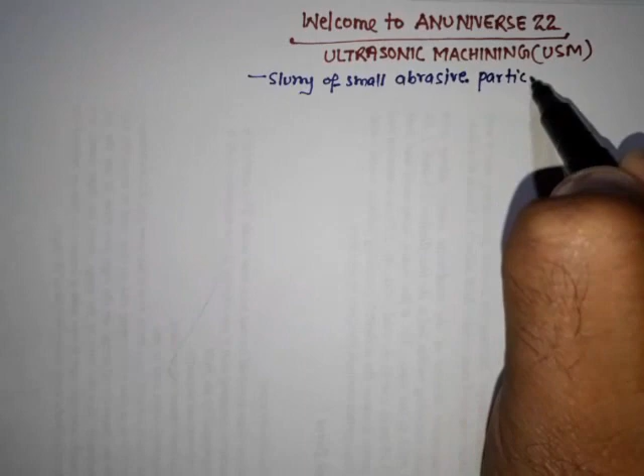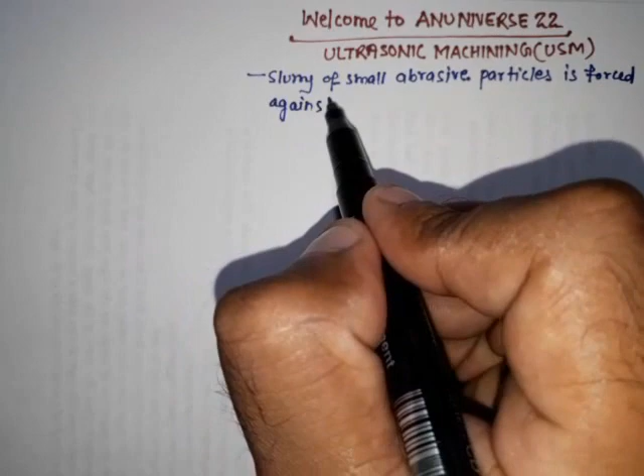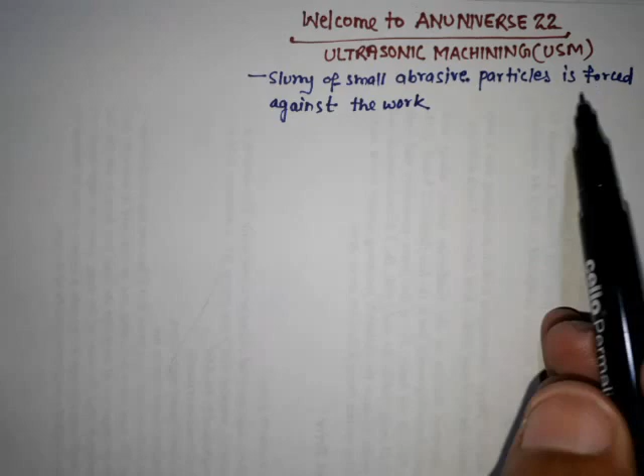So firstly, in ultrasonic machining, a slurry of small abrasive particles is forced against the work, by means of vibrating tool.

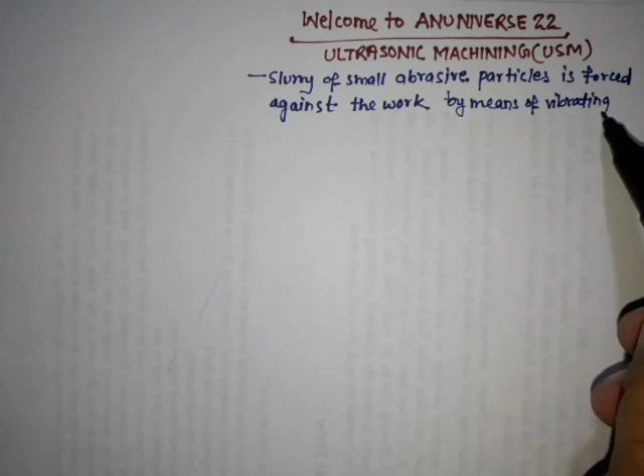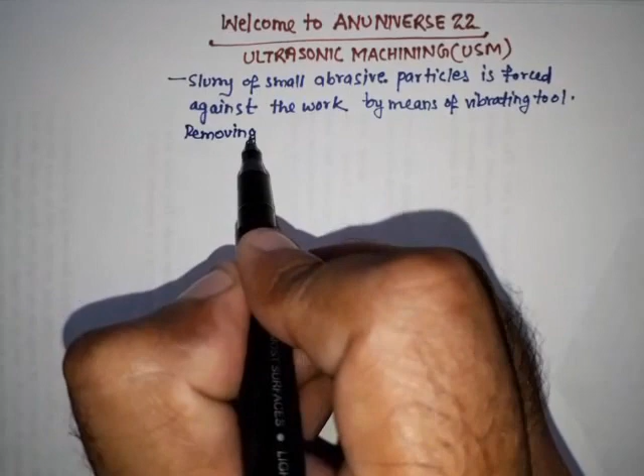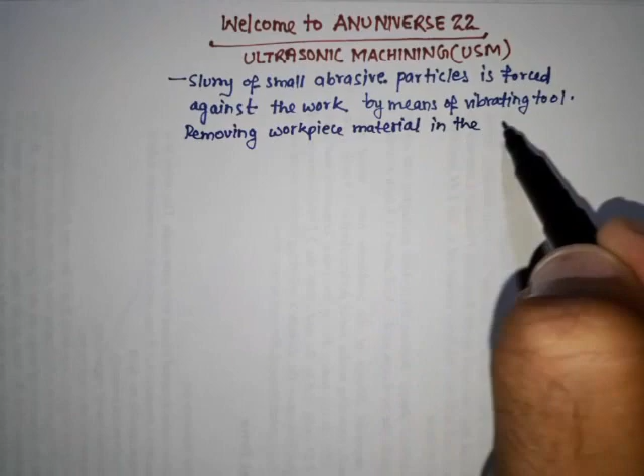And so with the help of vibrating tool, removing workpiece material, in the form of small chips.

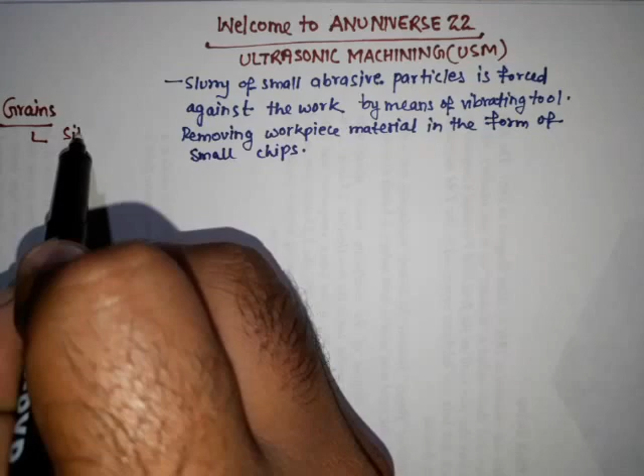And the abrasive grains which are generally used for this, these are generally made up of silicon carbide, aluminium oxide, and boron carbide.

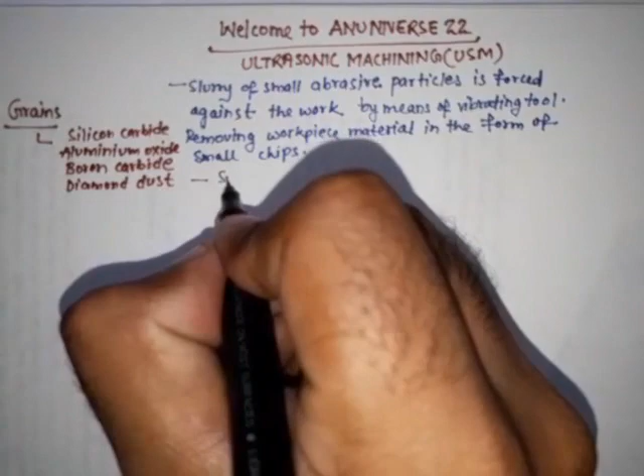And again, this process is mainly applicable, and we can say it is suitable only for hard and brittle materials.

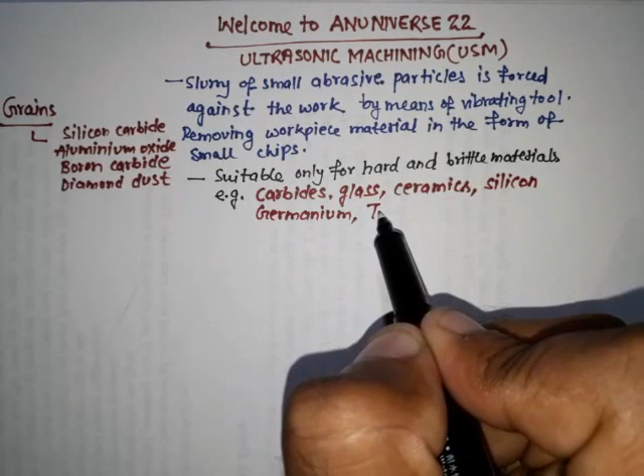So for example, carbides, glass, ceramics, silicon, germanium, titanium, tungsten, tool steel, die steel, ferrite, quartz, etc. So these are some of the materials for which this process is suitable.

And here one thing is important, that the vibrating frequency used for the tool, that is of the order of 20,000 oscillations per second.

And this is such a high frequency which is more than the upper limit of audible frequency for the human ear, and it makes the process inaudible, silent.

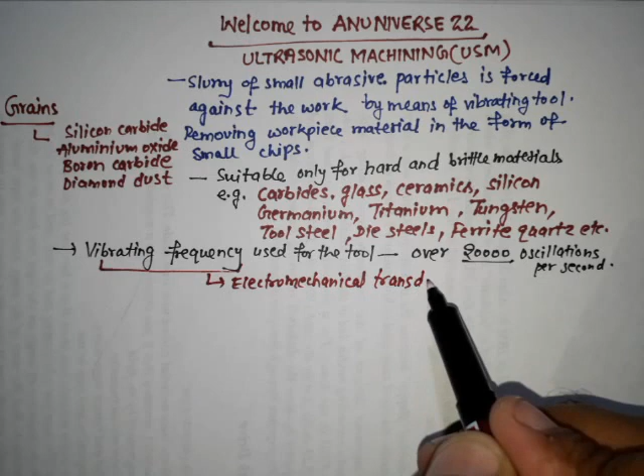And an electromechanical transducer is used for producing this high frequency of vibration. This transducer is made of magnetostrictive material.

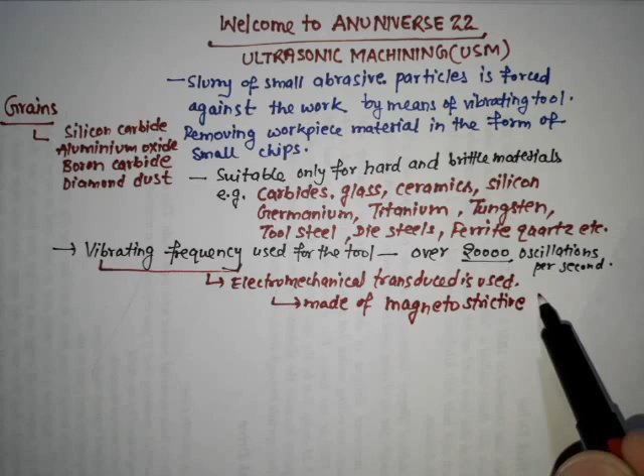So all this process we try to understand with the help of a diagram. This is ultrasonic oscillator, and here high frequency electric current is used to supply.

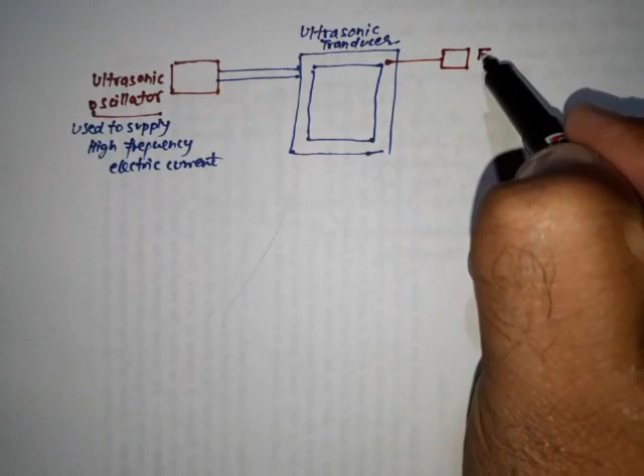And it supplies this high frequency electric current to the ultrasonic transducer. And here is the feed mechanism. And these are the coils.

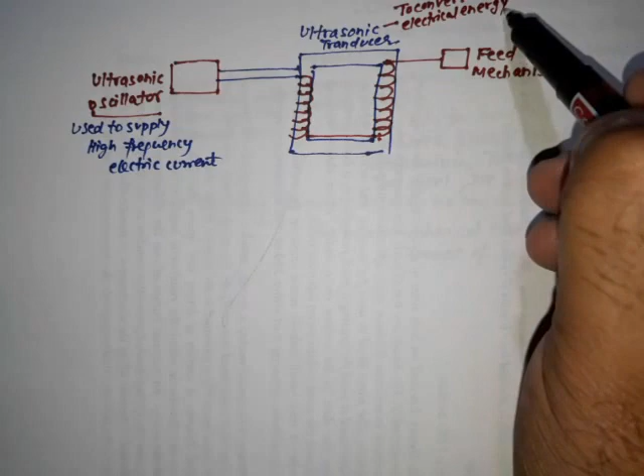So here the function of this transducer is to convert electrical energy into mechanical vibration.

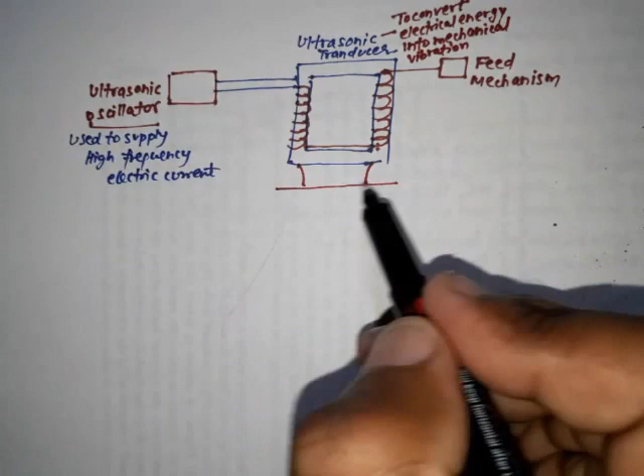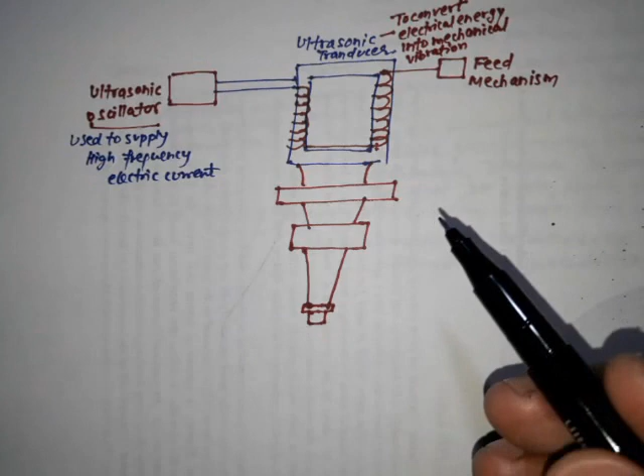And another part, these are the arrangement: transducer, cone or horn.

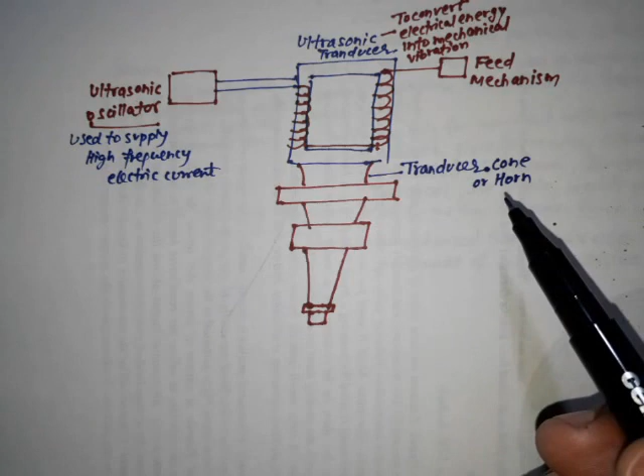So here the vibration that is generated is of the order of approximately 20 kilohertz to 30 kilohertz, and the amplitude usually varies from 0.01 mm to 0.1 mm.

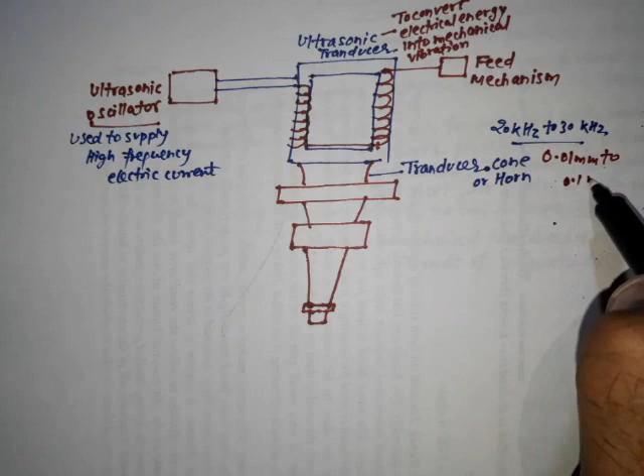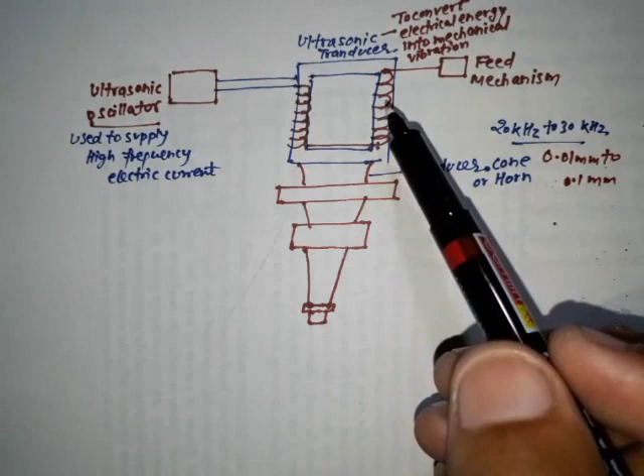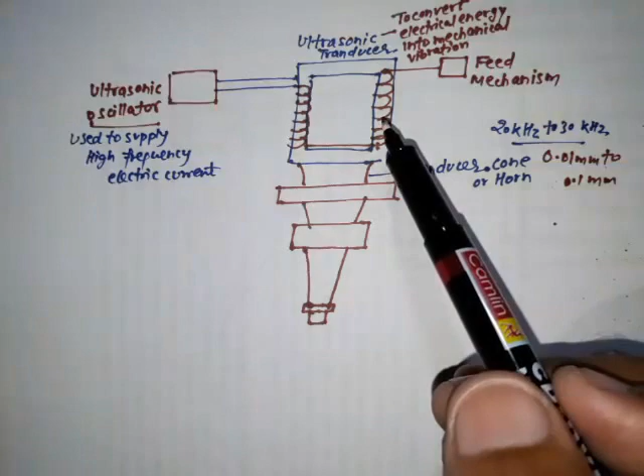And here the transducer, made up of magnetostrictive material, is excited by this high frequency current, and this results in generation of mechanical vibrations. These mechanical vibrations generated in the ultrasonic transducer are then transferred or transmitted to the cutting tool.

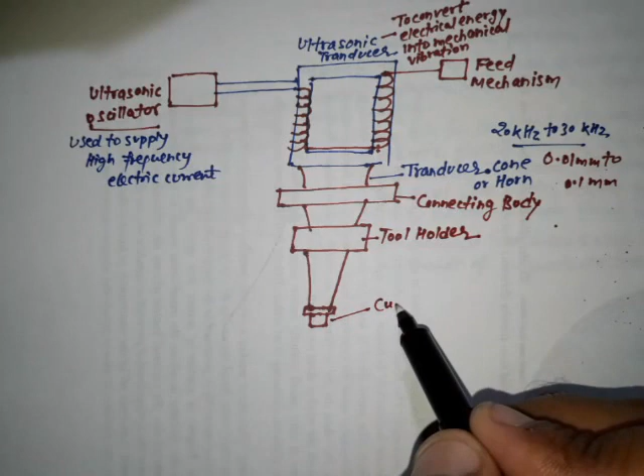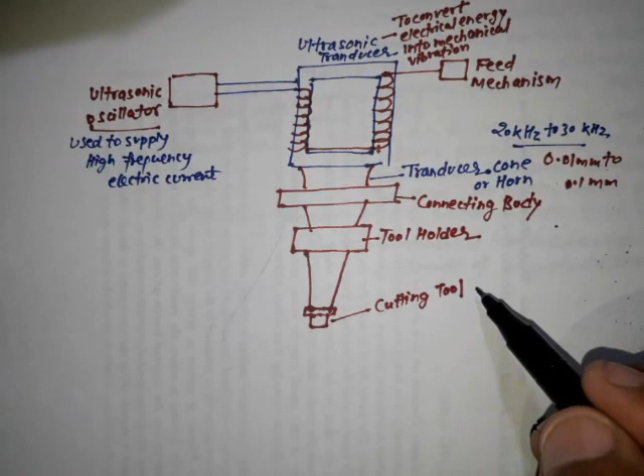So here this is the transducer cone or horn, this is the connecting body, and here it is the tool holder, and this is the cutting tool. This tool is made of soft metal.

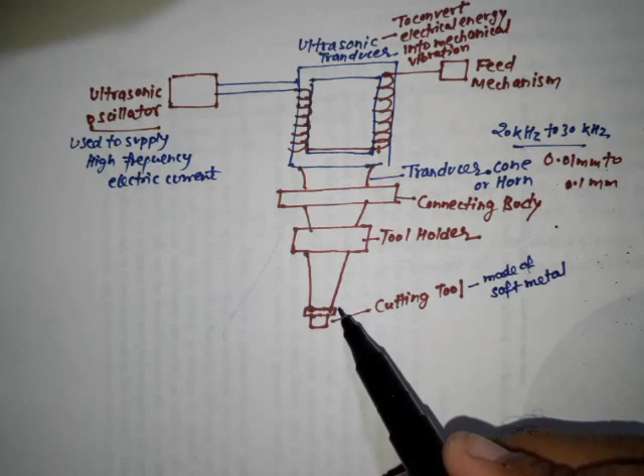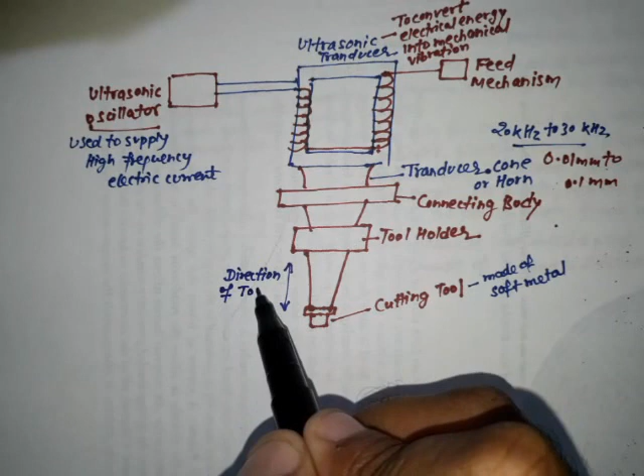So the direction of motion of this tool, this is the direction of tool motion, in the longitudinal direction. This mechanical vibration is transmitted to the cutting tool via the horn, connecting body and tool holder, and these vibrations make the tool vibrate in the longitudinal direction.

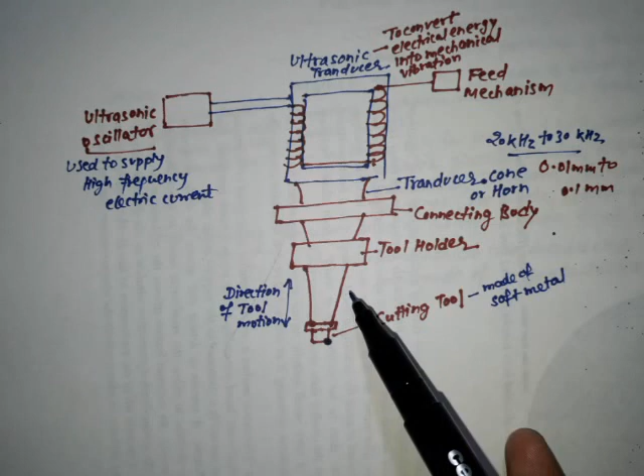And the intermediate parts together form what is known as the focusing unit, fastened at the ends. And the shape of the cutting tool is the same as that of the cavity to be formed.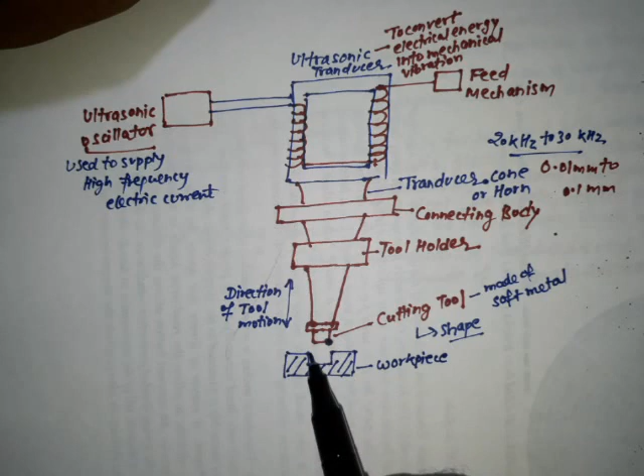So here we can plot this: this is the workpiece. So the shape of the tool is the same as that of the cavity to be produced, and this workpiece is mounted on its fixture, and this fixture is mounted on a table.

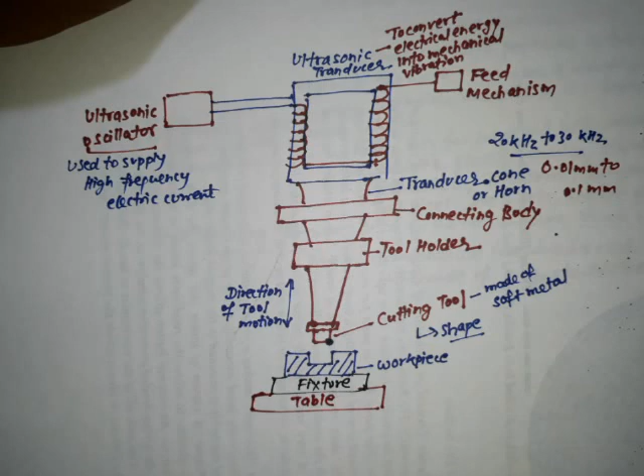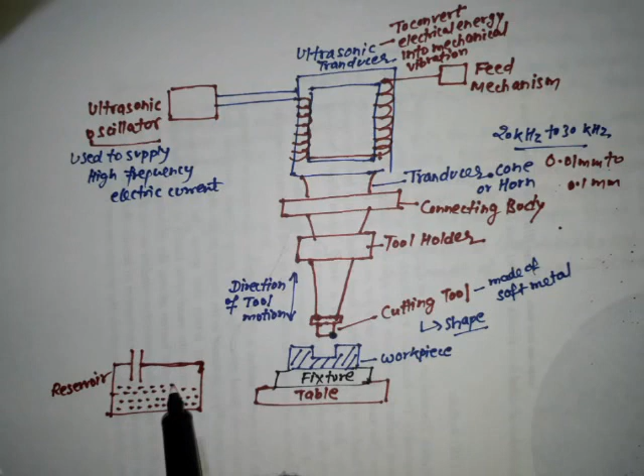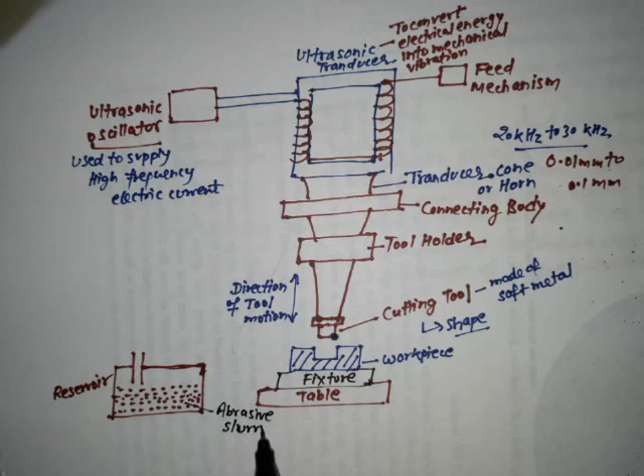So here is another arrangement for supplying the abrasive slurry. This is the tank, you can say container or reservoir, which contains slurry - grains of aluminium oxide, boron carbide and silicon carbide or diamond dust, etc. So this is the abrasive slurry, like silicon carbide, aluminium oxide, etc.

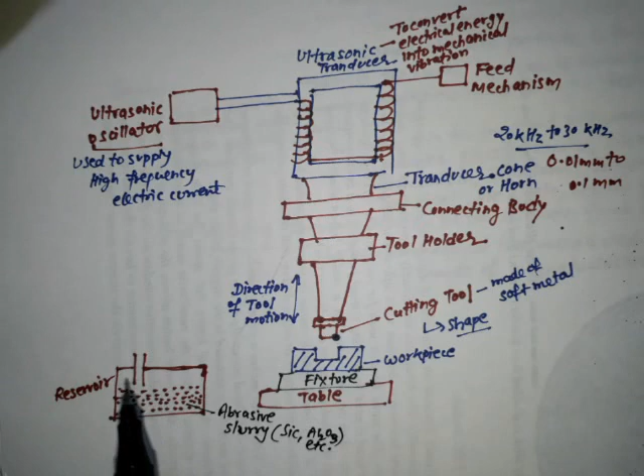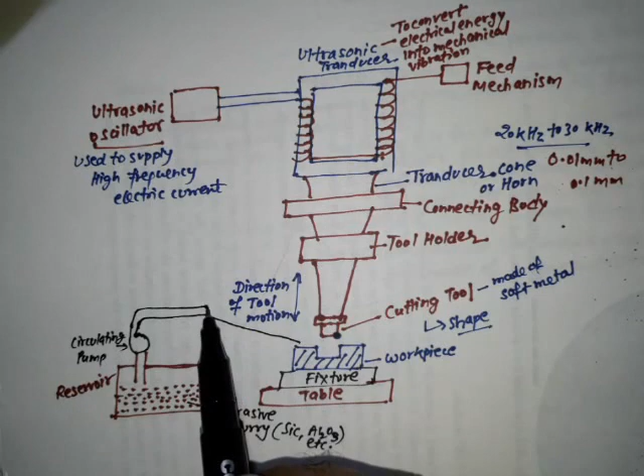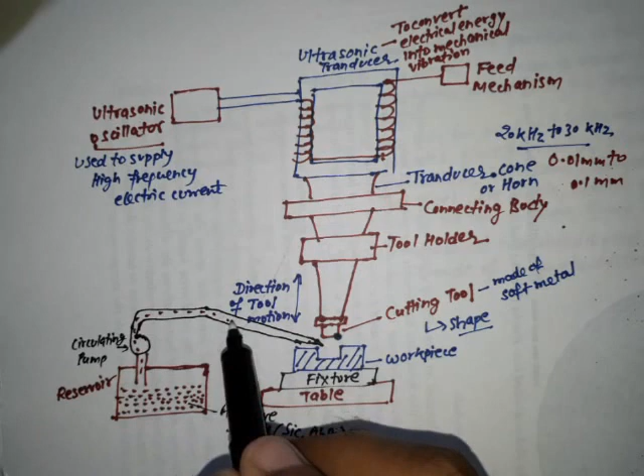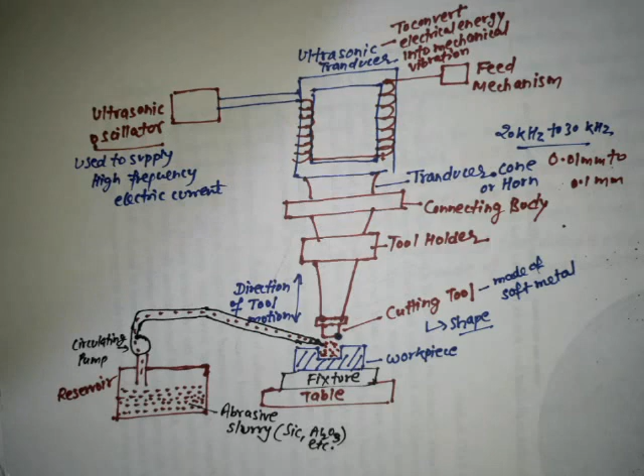So it is supplied with the help of this circulating pump, and with the help of this pump this slurry is supplied to the space between the workpiece and tool. Here we can say this is the abrasive slurry, and this is the direction.

So here this slurry is formed by suspension of the abrasive grains in the carrier fluid, and it is fed to the machining area by means of a circulating pump. However, in order to keep its temperature low, a suitable cooling system may be incorporated.

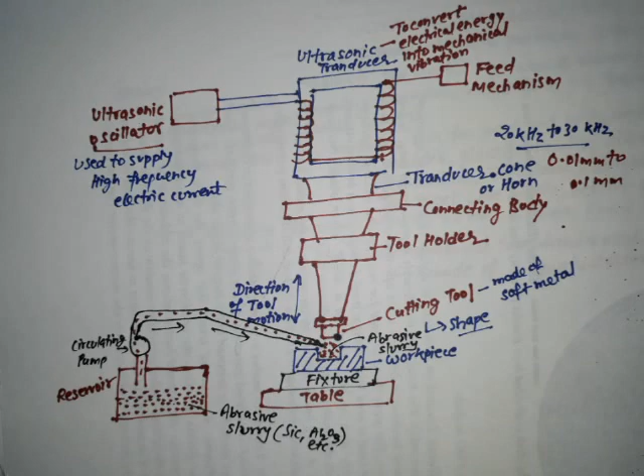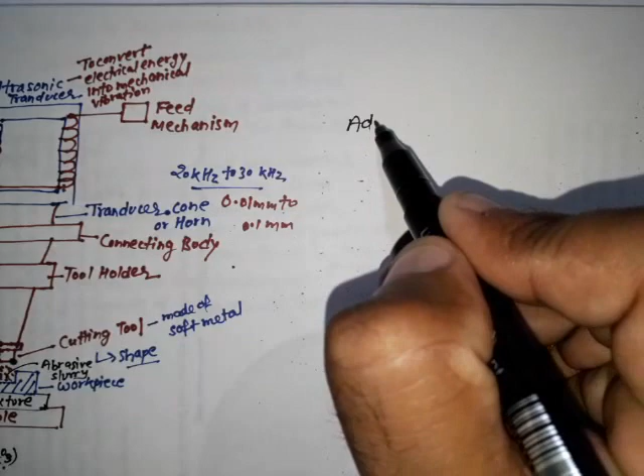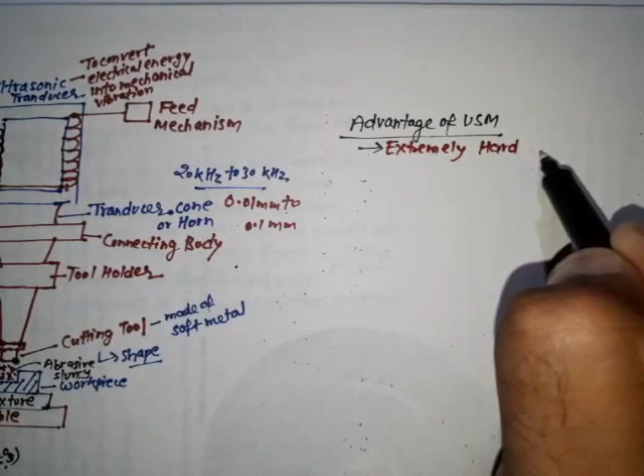So this is about ultrasonic machining, and here are some advantages of USM. Firstly, extremely hard and brittle materials can be easily machined.

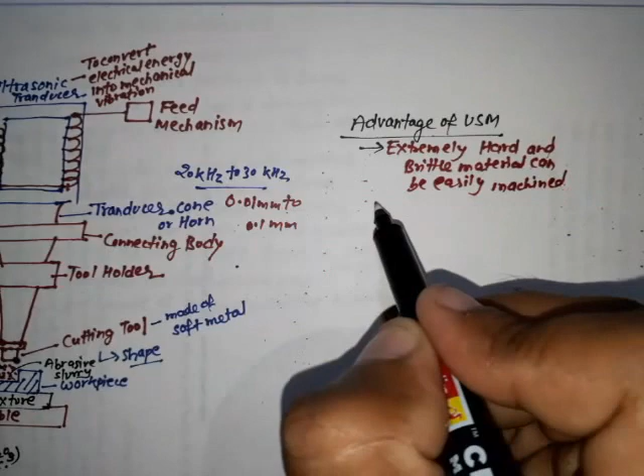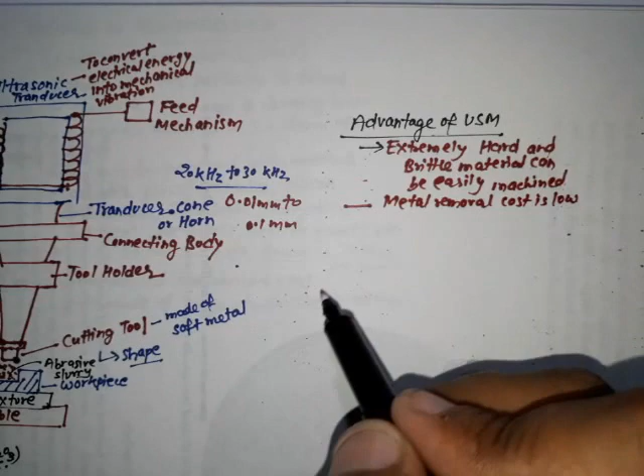Another one, metal removal cost is low. Operation is noiseless, and operation of the equipment is quite safe.

Another, the machined workpiece is free of stresses, and with the help of USM, highly accurate profiles and good surface finish can be easily obtained.

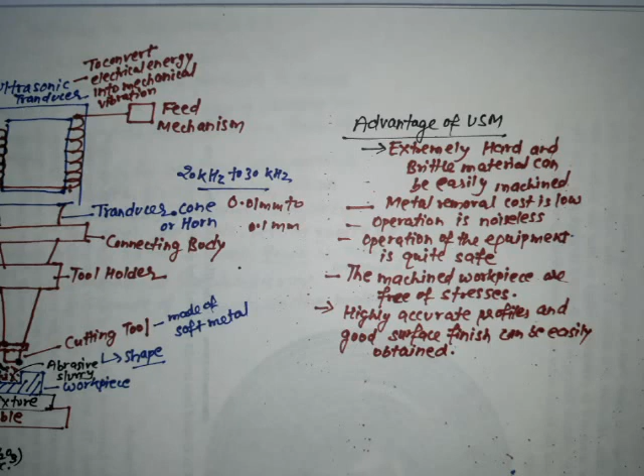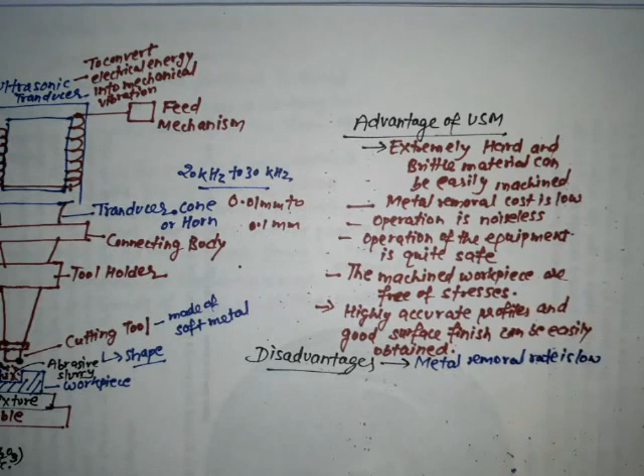So with these advantages, USM also has some disadvantages. First one, metal removal rate is low. Secondly, the cost of tooling is also high.

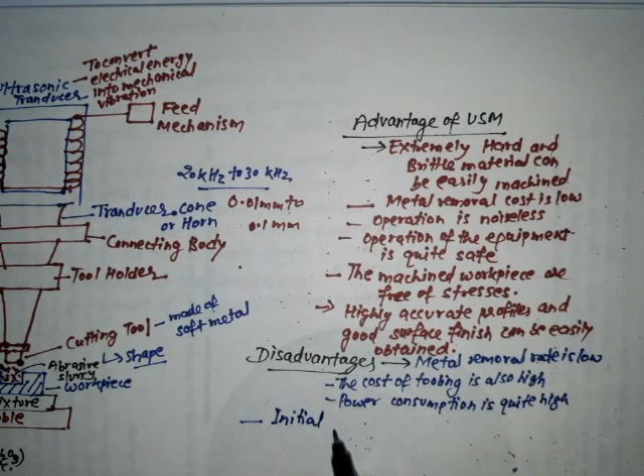Third, power consumption is quite high, and initial equipment cost is higher than conventional machine tools.

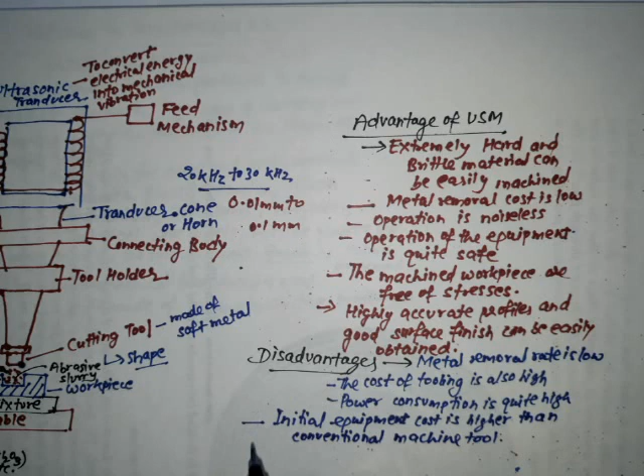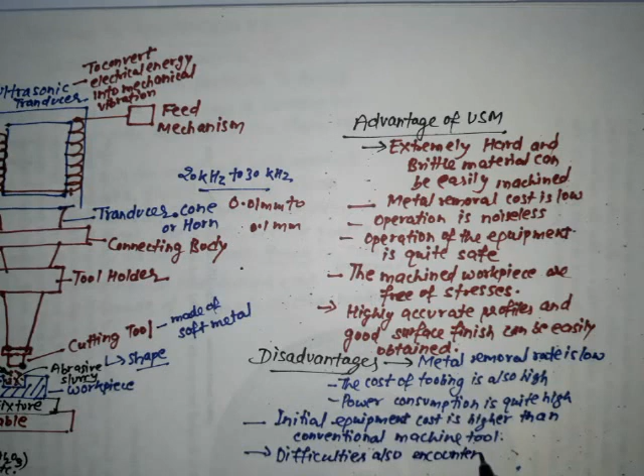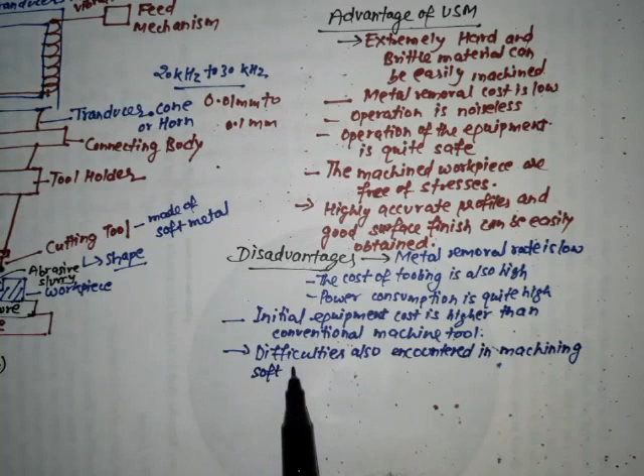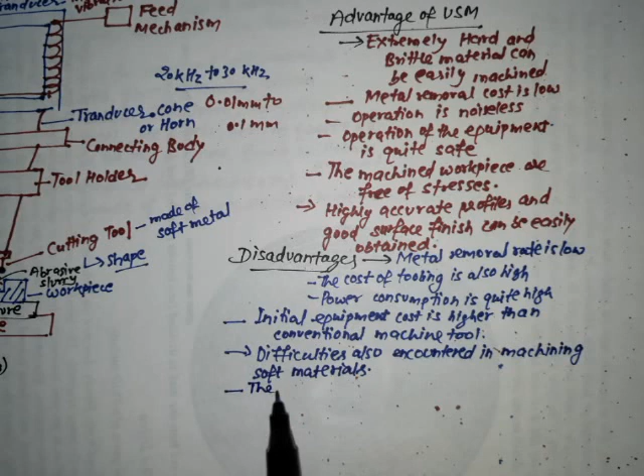And here another one, some difficulties are also encountered in machining soft materials. And here the size of the cavity that can be machined is limited.

And in order to maintain an efficient cutting action, the slurry may have to be replaced periodically.

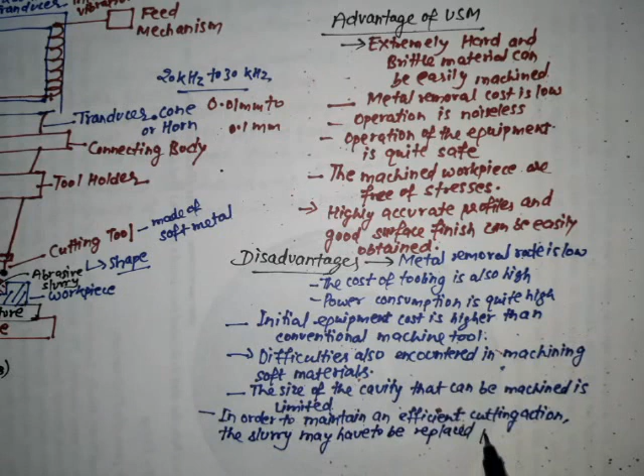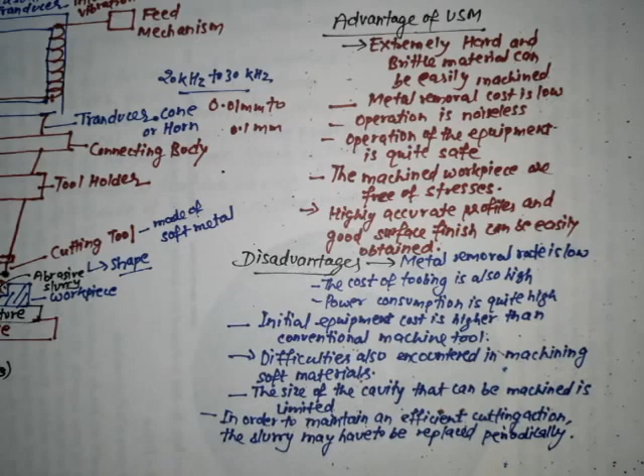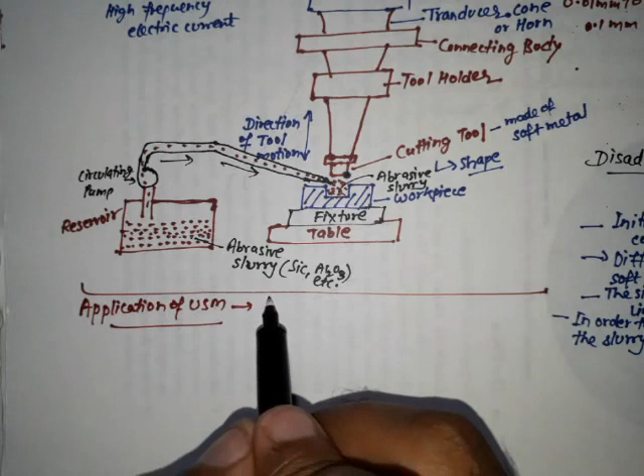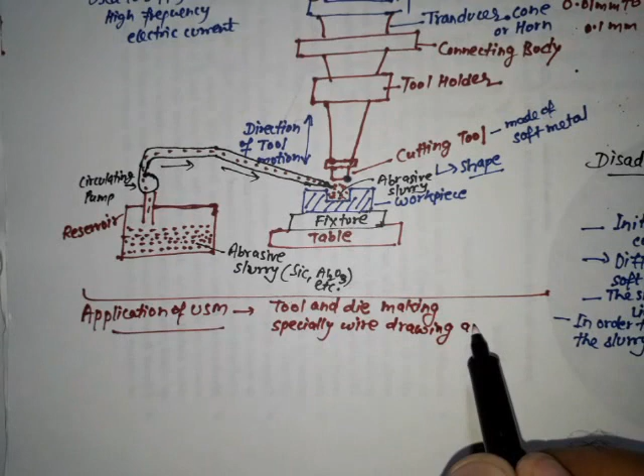So with these advantages and disadvantages, here are some applications of USM. First one, it is used for tool and die making, especially wire drawing and extrusion dies.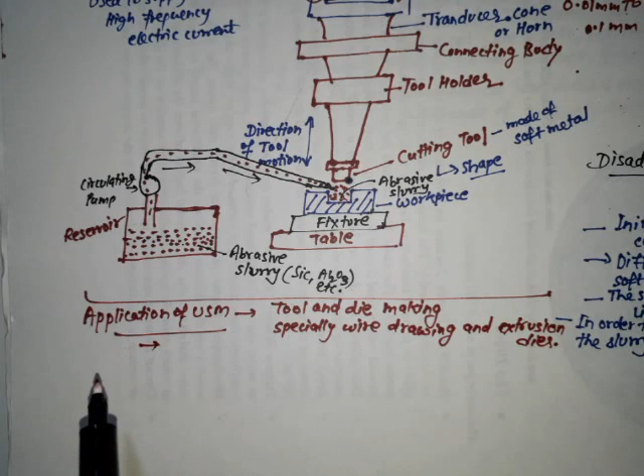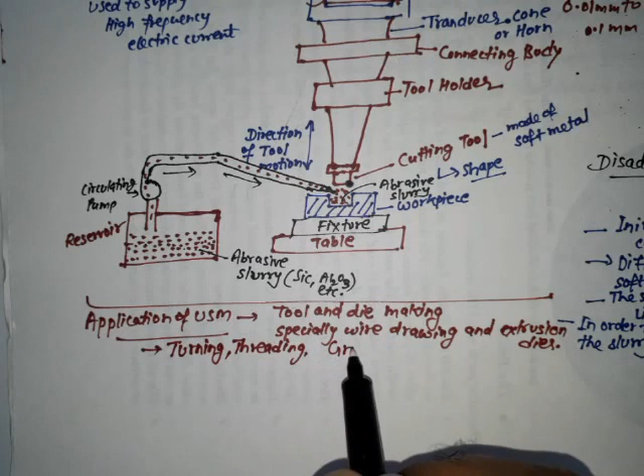And secondly, several machining operations like turning, threading, grinding, trepanning, milling, etc. can also be performed on USM.

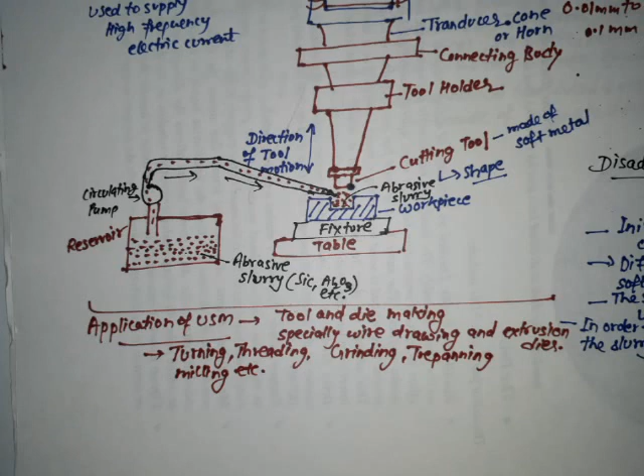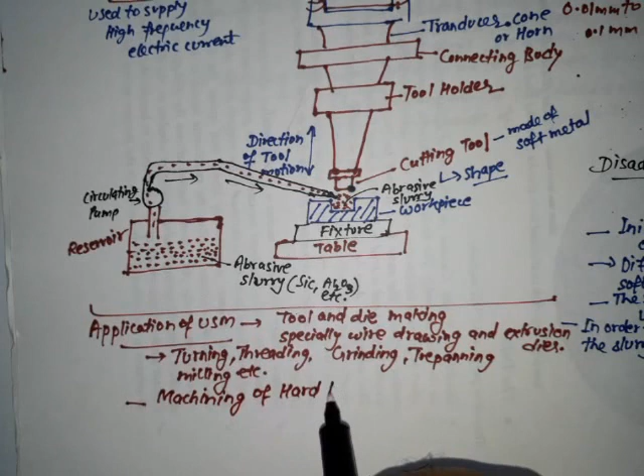Next, machining of hard to machine and brittle materials.

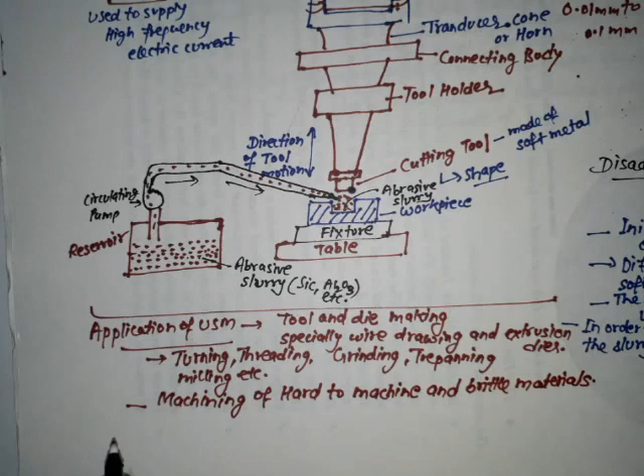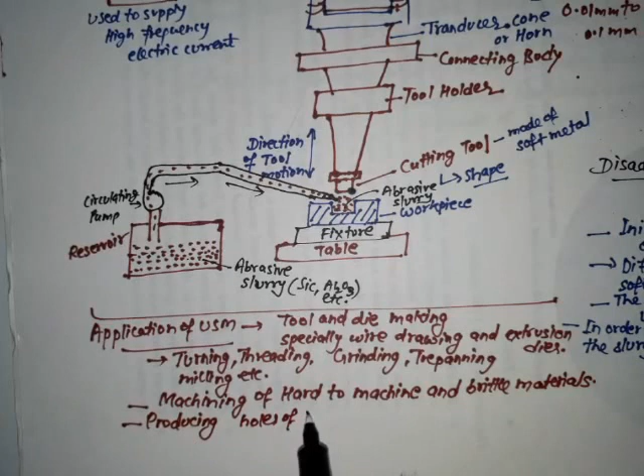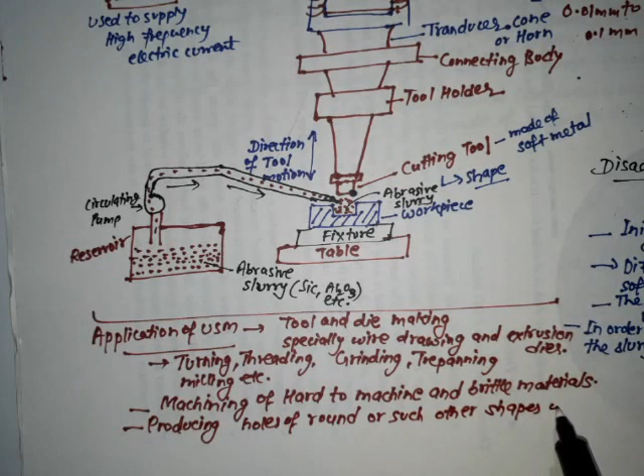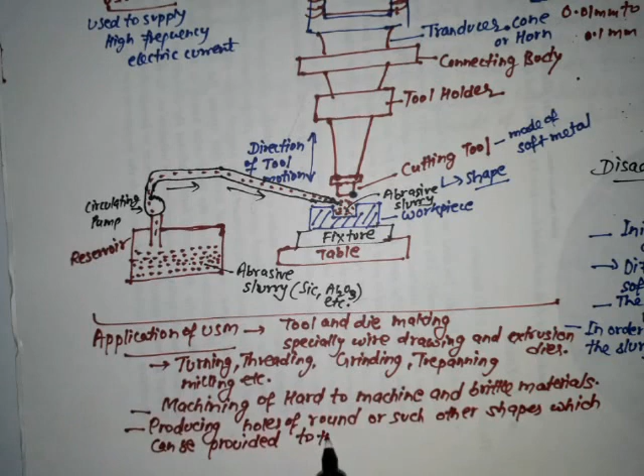And it is also used for producing holes of round or other such shapes which can be provided to the cutting tool.

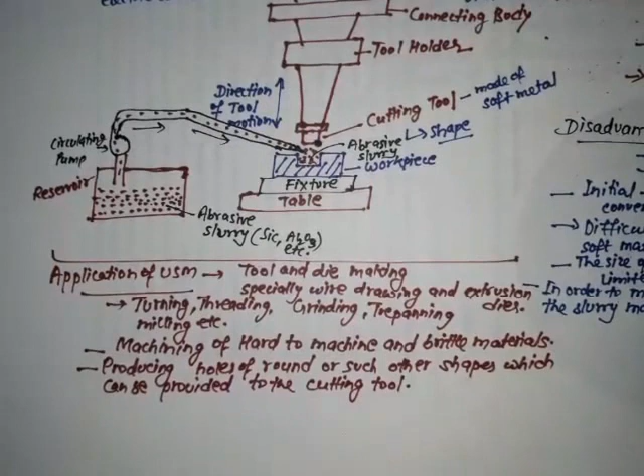Last one, it is also used for dentistry work, like to drill fine holes of desired shape in teeth.

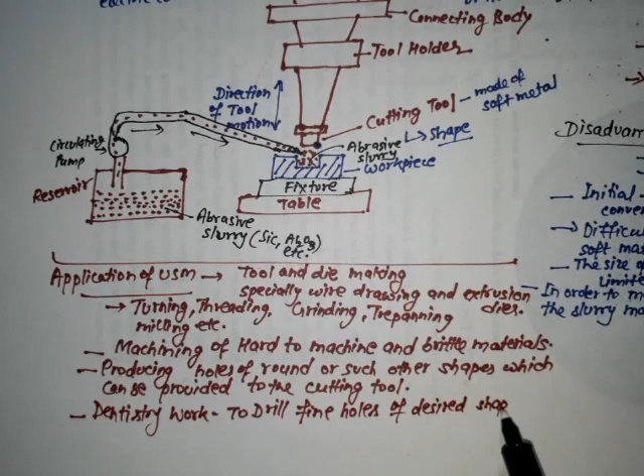So friends, in this video you have learnt ultrasonic machining USM, the working of USM, advantages and disadvantages of USM, and also the applications of USM.